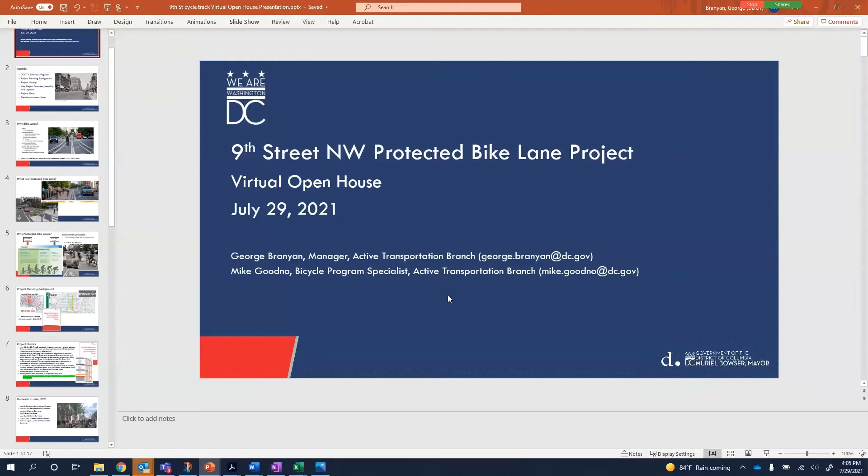Thank you for coming to the 9th Street Northwest Protected Bike Lane Project Virtual Open House. My name is George Branyan. I manage the active transportation branch at DDOT, and there's my email, which we'll put in the chat as well. I'm joined today by Mike Goodno, bicycle program specialist with the active transportation team. There's Mike's email address as well.

Good afternoon, everyone. So the agenda will be to talk about DDOT's bikeway program, the project planning background for this project, its history, some of the key project features, benefits and impacts. We'll take a look at the project plans, and then we'll talk about next steps.

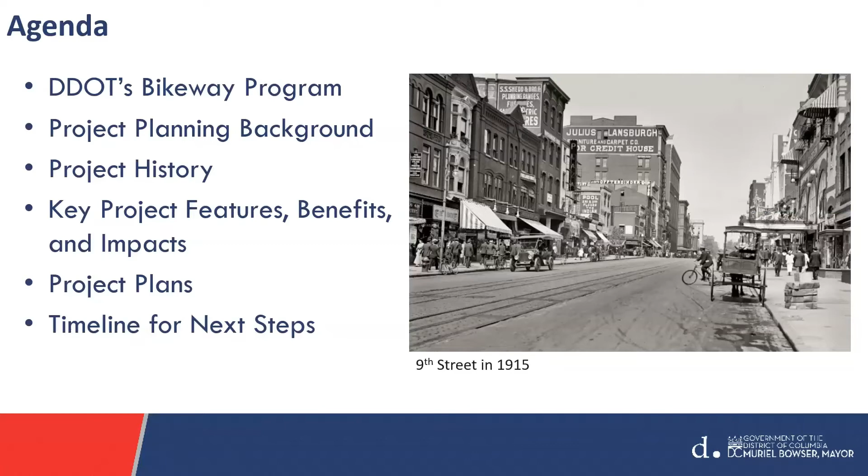So the question is often asked, why bike lanes? Well, they are safer for all road users, especially bicyclists. They actually do improve safety for all road users because of the way they typically reconfigure the roadway. They have lots of other individual benefits, including economic benefits. Often one of the main things is environmental benefits, a reduced amount of cars on the road and CO2 emissions, as well as system management benefits from reduced wear and tear. A network is critical in supporting biking, to have the bike routes easily connected to one another.

I'll note that bike lanes may be used by scooters, skateboarders, electric wheels of all kinds, and electric bikes, obviously. But one useful thing is that where we've had sidewalk riding conflicts with pedestrians, with scooters or bicyclists, we've found that bike lanes typically pull people off the sidewalk and give them room in the roadway, which is better for pedestrians.

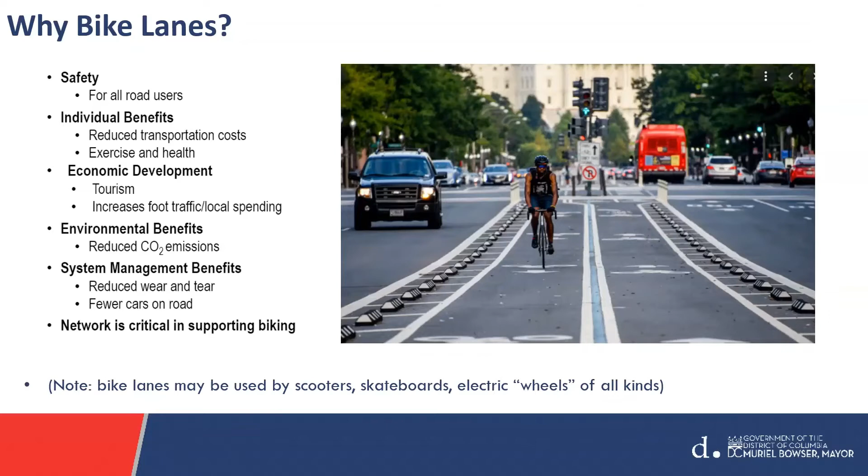What is a protected bike lane? This is a bike lane that is physically separated from the travel lanes where the vehicles are. We have different types of these, sometimes separated by flex posts, as in the upper picture, sometimes concrete islands, which may be combined with parked cars, which is a very substantial barrier then between the moving traffic and the bicyclists.

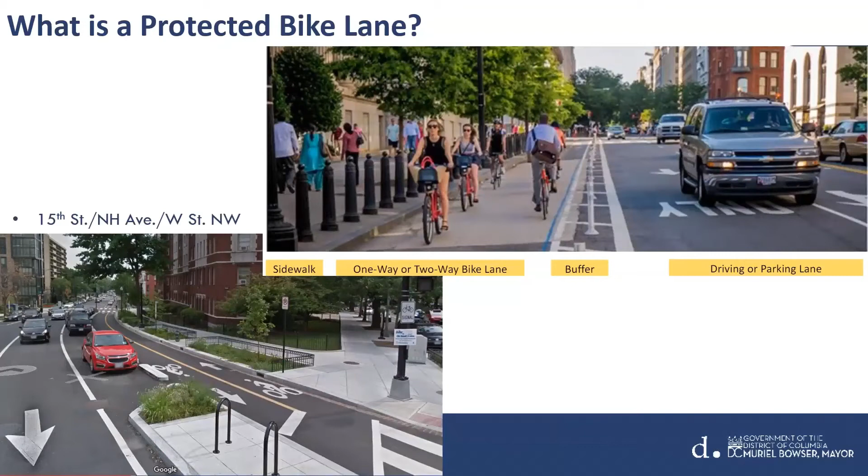And there's a reason that we are building more and more protected bike lanes. We're in the middle of a 20 miles by 2022 program. And on top of that, the mayor has charged us with building 10 miles of protected bike lanes per year starting next year. We ramped up over the last couple of years, and we're ramping up even further.

The reason we want to build protected bike lanes is that standard bike lanes, just the regular painted bike lanes, or roadways without bike lanes at all, are really high stress facilities to bike on. Only the strong and fearless typically ride on those, or in this green illustration, the highly confident riders, which is a relatively small percentage of the population.

But what we found, and many cities across the country found, is that by building protected bike lanes, they'd be able to expand the group of people who feel comfortable enough to ride in them by a significant amount. So we're looking for those who are somewhat confident, and also the interested but concerned, which is the largest group of people who are not often comfortable with regular bike lanes and may bike on the sidewalk or not bike at all because they just don't feel safe.

And so the protected bike lanes create a situation where people feel much safer and are much more likely to try riding to work, for errands, or for recreation. And so that is one of the main reasons we're building those.

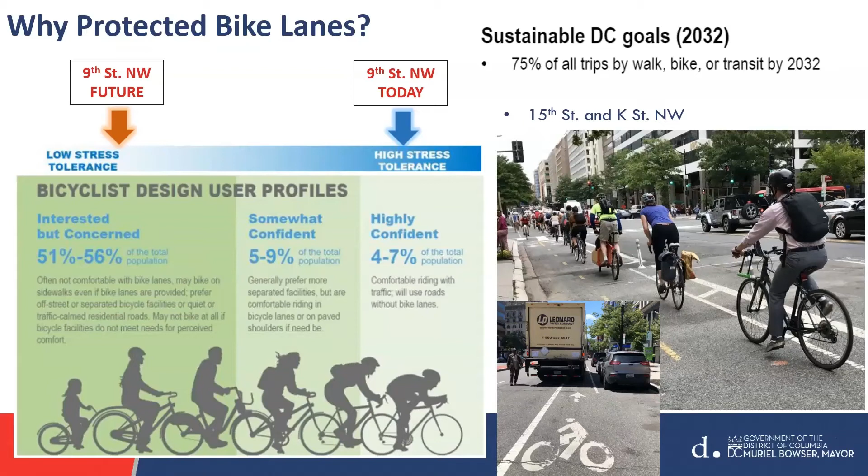Some of the project planning background has to do with our long-range plans. In 2016, the first Move DC called for a protected bike lane on the east side of eastern downtown. The new Move DC update does call for 9th Street to be the protected bike lane through the eastern downtown area, as well as 7th Street, but that one would be much further out in the planning process.

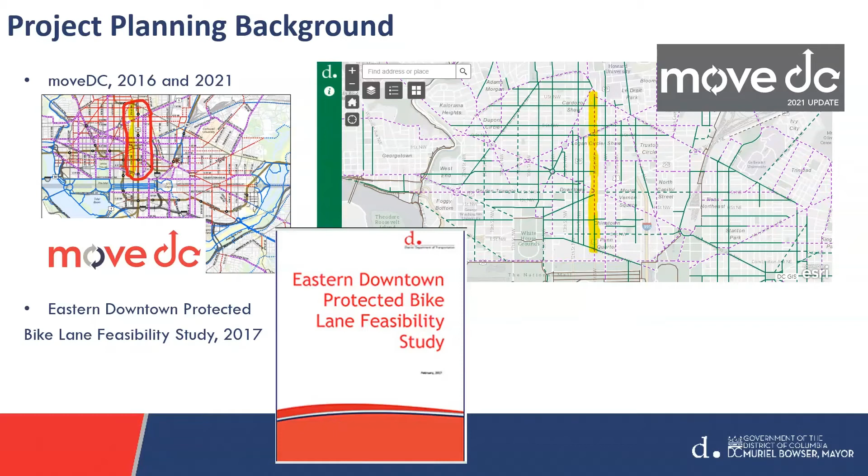To move forward the eastern downtown protected bike lane concept, we started a study in 2015, concluded in 2017, which looked at multiple corridors in this section of downtown. It looked from 4th Street all the way over to 9th Street, defined as the eastern downtown area. This project was developed out of that feasibility study, as 9th Street was one of two priority or preferred corridors to come out of that study.

All the other options fell off as we applied different tests to them, comparing and contrasting how safe it made it, how it affected traffic, and how it affected parking. And 9th Street became the preferred alternative. We began to move it forward in 2018.

It was put on hold in late 2018. And then the mayor announced a restart of this project in May of 2021.

So all of you know up front that this is not going to be constructed this year. Right now, we are working on taking all these comments that we hope to get tonight, and through all the other outreach we've been doing, to the 30% plans, which is what we have right now. And the mayor's budget has provided funding to complete the design in FY22 and to construct this in FY23, which begins on October 1st, 2022.

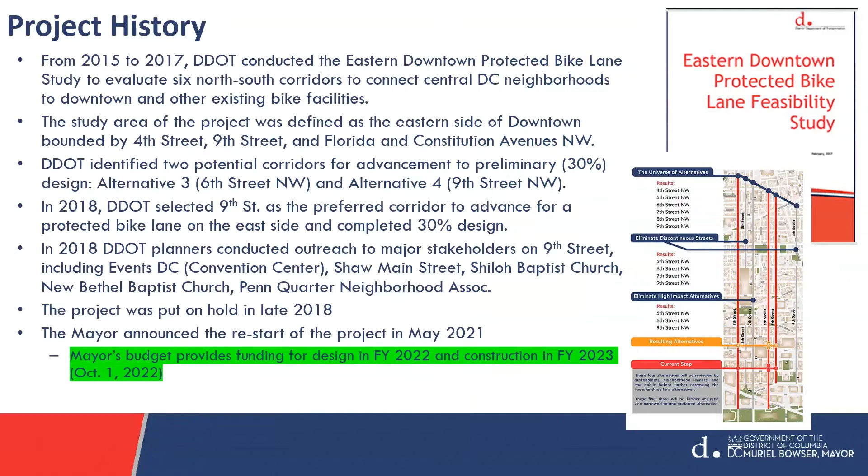So conceivably, the construction would start no earlier than October of next year. So it gives us a lot of time to take comments and refine these plans.

Outreach to date, since we restarted this: on June 3rd, we met with Convention Center, Events DC. We've met with 3 out of the 4 ANCs, and up next is ANC 2F on August 11th. And we met with the Shaw Main Street organization.

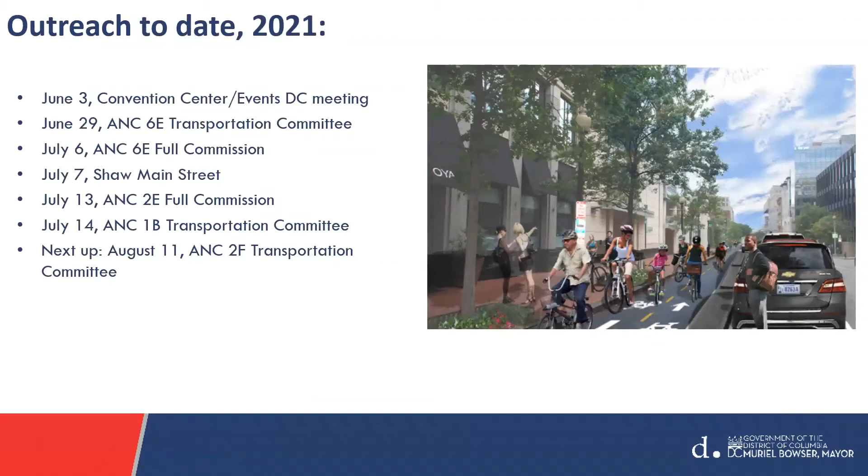So the study that looked at multiple corridors in this region of downtown looked at 5th and 6th. It looked at 6th as a separated bikeway, a 2-way cycle track on the east side of 6th, and then a 9th Street east side protected bike lane.

There's a lot of information on this slide, but it's here to explain that under all these categories, 9th Street came out as the best alternative in terms of all those different impacts: the continuity of the bike lane, how much of it is protected, conflicts with turning vehicles that cyclists would encounter at intersections, potential pedestrian conflicts, intersection traffic impacts, estimated travel time in the AM and PM, potential large event space impacts such as the convention center, street parking, and Sunday angle, back-in angle parking.

And when you take all these together, 9th Street was the best alternative.

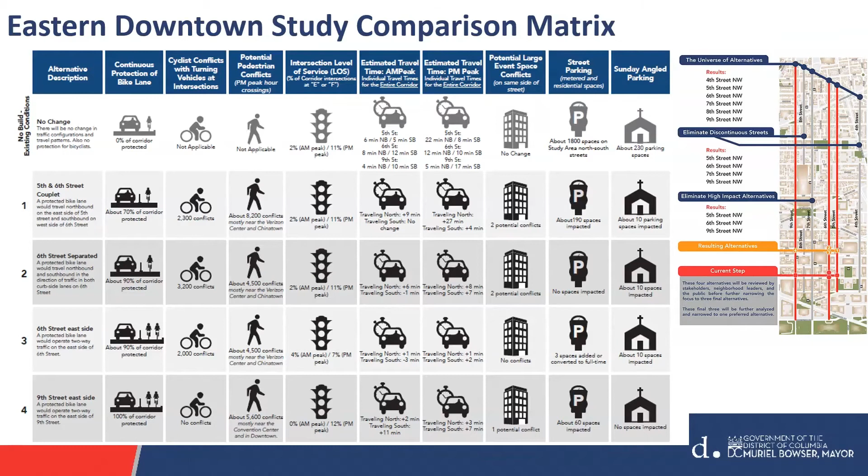All right, so this is the first slide that takes a look at the plans. This shows 9th Street north of Mass Avenue up to Florida/U Street.

So this is the section that is 2-way. On the left is the existing condition, which is 2 lanes northbound, 2 lanes southbound, and parking on each side. Some of that parking is metered, some is resident only, some is RPP, resident permit parking.

But that is the basic configuration from Mass Ave up to Florida U. On the right, it shows the proposed condition and how we are fitting in this bike lane. So next to the sidewalk is a 2-way cycle track with yellow dashes going down it, then a buffer area of about 3 feet, then a parking lane, and then 1 northbound travel lane. On the opposite side of the street it's essentially the same as existing, with 2 southbound lanes and a parking lane.

Now you also see that there's a turn pocket in there, which we're adding all along the corridor. This helps the street operate better and more safely for drivers, and protects both cyclists and pedestrians from left-turning vehicles, because they're given a pocket to wait in and then an arrow to move on. When they have a green arrow, the peds and bikes have a red light and a don't walk. So this is how it looks north of Mass Ave.

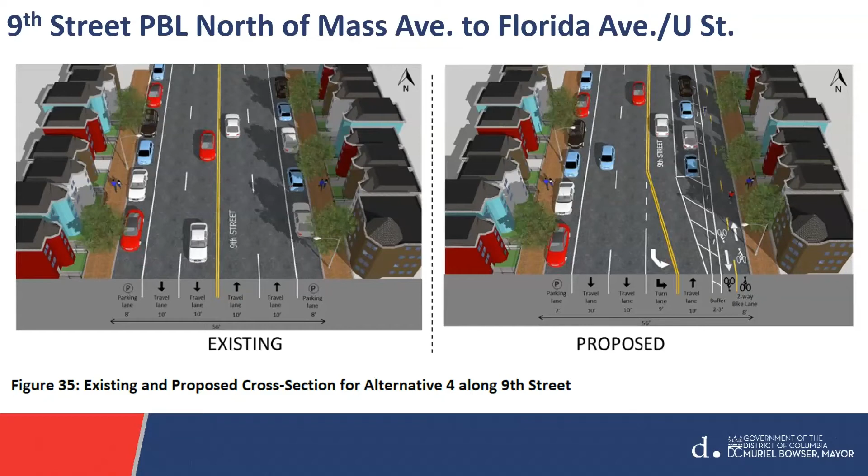Now this section is just a sample of what it would look like south of Mass Ave. Right now there's parking on the east side, parking on the west side, predominantly metered parking, 2-hour metered parking. And then there are 3 southbound lanes.

This shows a bus lane. The bus lane is no longer in use. We've talked about transit - the couplet, which is 7th and 9th, is no longer in service. There is only one bus that is on 9th Street currently. So that bus lane graphic does not apply to the existing condition anymore.

So in the future condition, you can see there is this 2-way cycle track or 2-way bike lane on the east side, and then a parking lane outside of that bike lane. You also see a left turn pocket, which we're also adding to those southern blocks as well. And then 3 travel lanes.

What isn't shown here is that west side travel lane on the left side would become parking outside of the peak hours, both AM and PM. In order for the roadway to continue to flow about as well as it does today, a little bit better actually with the left turn pockets, we need to have 3 southbound lanes during peak. So in off peak, you would be able to park on the west side.

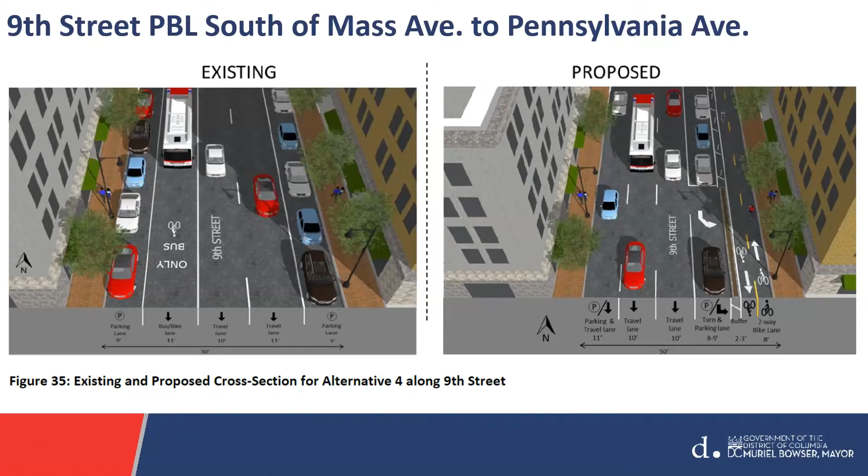Now this is an overhead sort of bird's eye view, a plan view we call it, of the one-way section. So this is the section from Pennsylvania Avenue up to Mass Ave - the last 2 blocks of that, from H to K.

So what you can see is the upper picture is the existing conditions, and the cars that are shown there - the green ones are metered, the yellow ones are taxis, and the brown ones are a valet zone. That valet zone is now taken up by the Cuba Libre streetery. But other than that change, this is the existing condition with the metered parking and the taxi stand.

And so what you see below would be the future condition, where at the south end, the left edge of each of these blocks, there's a left turn pocket to clean up the operations and provide storage for left turns. And then outside of the bike lane are the parking spaces - both the green ones would be metered spaces, and the yellow would be the taxis that service the Renaissance Hotel.

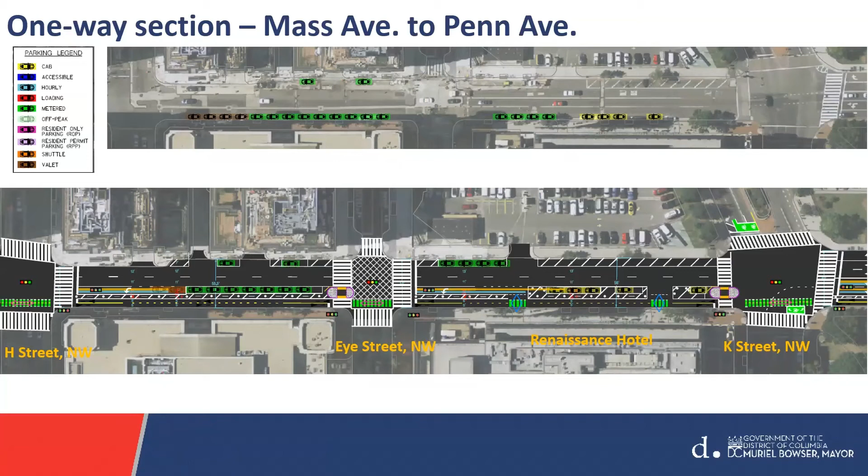Moving upward northbound to the two-way section, this is the block from S to T. This shows you how the one northbound lane is removed. The bike lane is against the east curb, which is on the bottom edge of the roadway.

The other thing I want to point out in this plan view is the left turn pocket. One of the reasons we lose a little bit of parking when we push the parking lane out is that we need some space for that left turn pocket turning left onto S Street. As you can see, when you move the yellow line over to create the left turn pocket, it takes away the room for the parking lane. So the parking lane is not able to come as far south on that block as it is on the north. It comes pretty far to the north because T is a one-way street, and so we're able to bring that up without having a turn pocket there. That is one of the two-way sections.

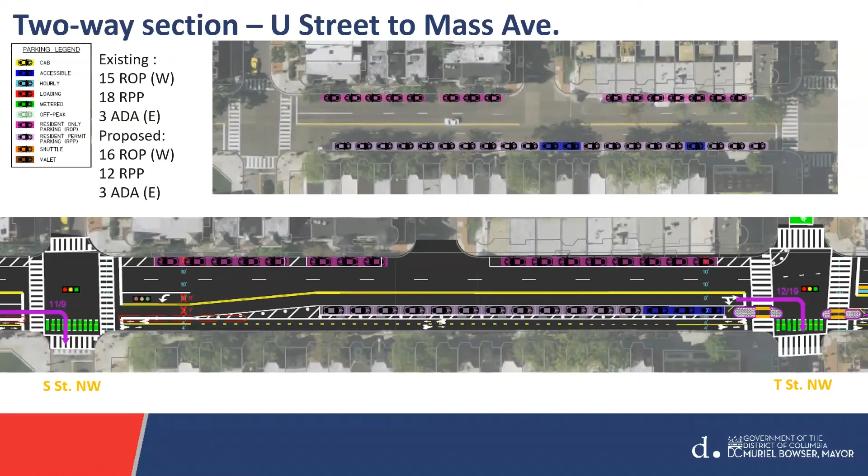I wanted to show another section up in the part of the corridor from S to U. This one's a little bit zoomed out, I apologize, but the block on the right here from T to U was a difficult block because it's relatively short and we have to have turn pockets at both ends. This meant that when we tried to fit in the 2 southbound lanes plus a parking lane as exists today, and have parking on the other side, the distance between the 2 turn lanes, as I mentioned earlier, the turn lanes are extra space needed at the ends of a block. This block is relatively short.

So we ended up with only about 2 or 3 parking places. In some of our discussions with Shaw Main Street, they felt that was too big an impact. So we took a look at this block, looked at the traffic analysis, and found that during the AM peak, the 2 lanes southbound are definitely needed. We have something like 600 to 700 cars in the AM peak hour. But other times of day, and in the PM which is interesting, it doesn't even have 400 cars, so that can fit in 1 lane.

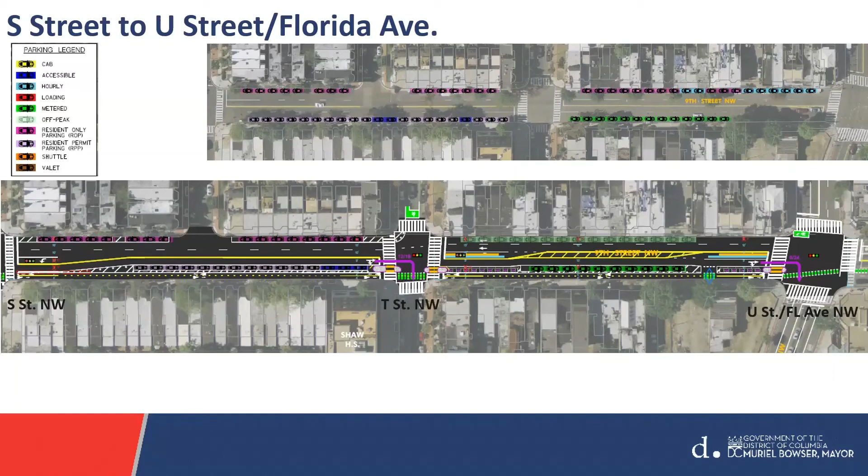Trying to move on, so just an overview of some of the features, benefits, and impacts I've been talking about - let me go through them on this table. Safety and continuity of the bike facility: right now it's a high stress and unsafe cycling condition. We don't get very many cyclists on 9th Street because it just isn't a very safe place to bike. What we end up with is 1.6 miles of a protected bike lane. All the heavy turning movements are protected or prohibited, but mainly they're protected. Vehicular traffic - one of the things we look at and do analysis on is what happens to the traffic flow and congestion.

This corridor performs pretty well today already. There are a couple intersections that have a moderate amount of congestion. They would get just a little bit worse in the future condition.

Another way to measure it is travel time. We found that the southbound AM peak travel time actually decreases, meaning you'll be able to make faster progress southbound on the corridor in this future condition, from 11 minutes to 8 minutes to get from the top to the bottom. This is mainly due to the turn pockets, which help clean up the turning vehicles, getting them out of the flow of through vehicles.

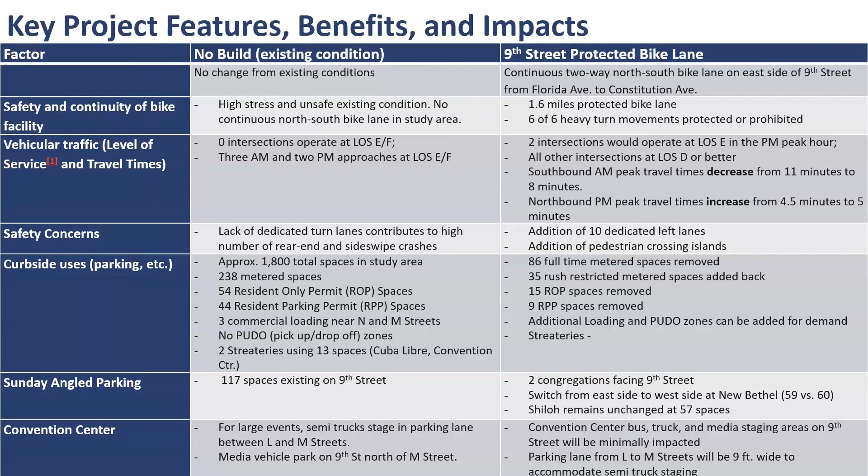All right, been throwing a lot of information at you, so I'm done with the content slides, and this is our next steps.

As I said, we've done ANC and Shaw Main Street meeting outreach. This is the DDOT hosted open house today, this evening. We are working to make refinements to the 30% plans by the end of the summer, and probably will continue to finish that up into September. Then that's when we will turn it over to our engineering team to develop the 65% and then 100% plans over the next 5 to 6 months.

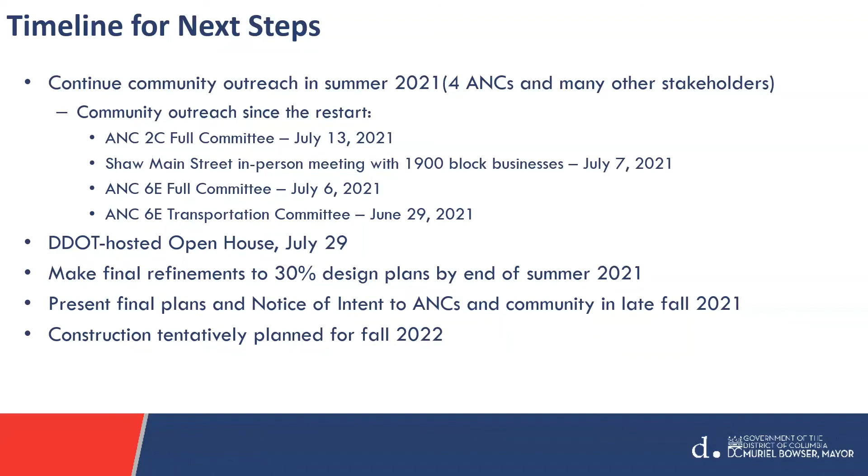We're looking to have some 65% plans in the fall to go to the ANCs again and put out the notice of intent again to take more feedback and answer questions. Right now, the construction is tentatively scheduled for the fall of 2022.